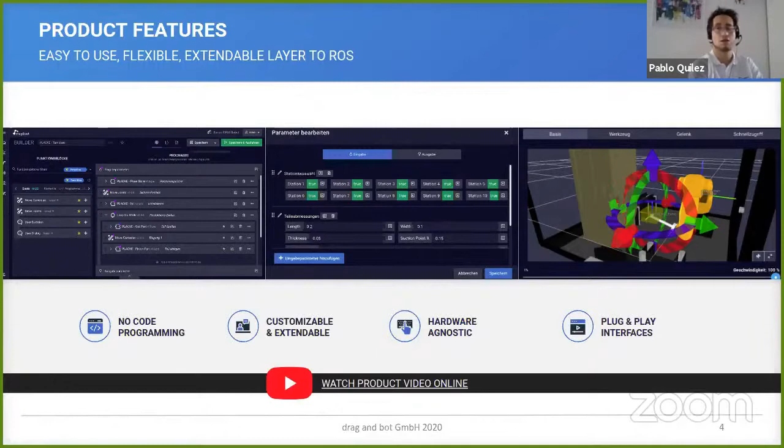This all leads to the plug and play interface, which is our vision, our philosophy. You can connect everything, just like in a computer when you connect a mouse or a printer, and it just works out of the box.

If we look a bit in detail at the scope, DRAG&BOT covers all the necessities of the factory floor, starting from the robots. We support more or less 10 different robot manufacturers, cameras or vision systems, PLCs, different grippers or sensors, feeding systems, and we offer the possibility to integrate any kind of hardware very easily through our API and SDKs. This is why third-party software is very important for us.

From another point of view, DRAG&BOT covers this scope through three different steps. The first one is the planning, which is the simulation. You can create your own program, define your own cell and scenario, and then test, for example, the reachability, the cycle time, and the return on investment.

You can also load your own CAD models into your environment and do simulation with them, so you can grip and use them. And of course create your program, the logic, and run it, everything in the cloud or also locally.

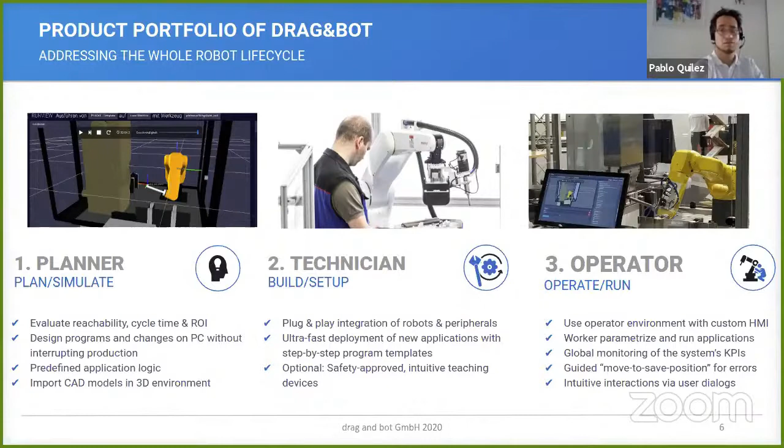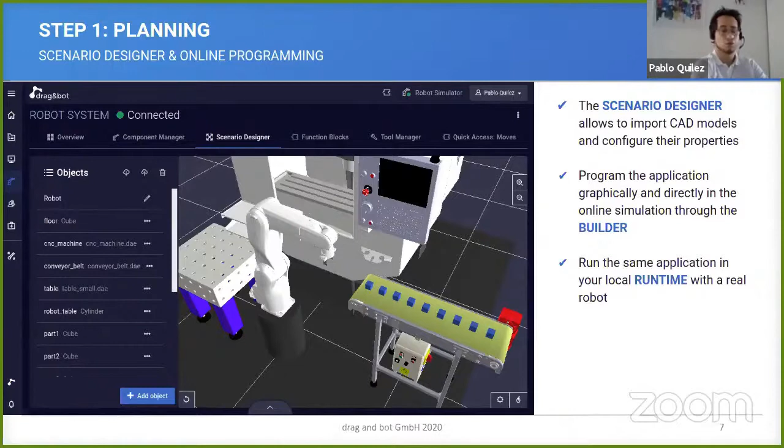In the second step, we display one example: the motionMATE. This is the new way to teach applications. You just need to configure your hardware, place the two sensors around the workspace, mount the calibration tool on the robot flange, run a small calibration program, and then the tracker is calibrated to your robot.

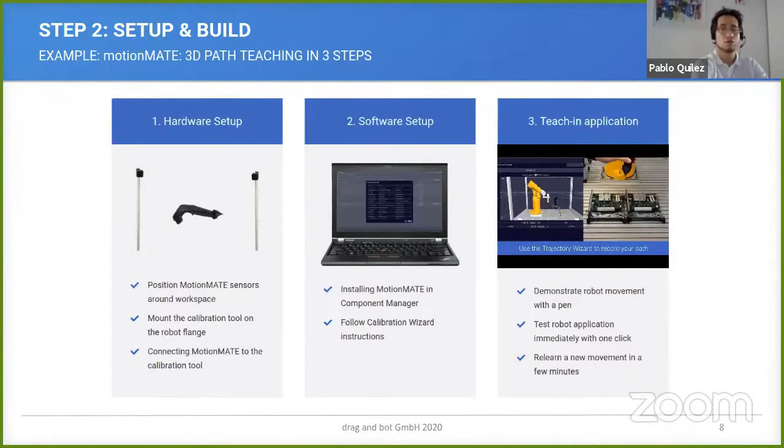I also want to give thanks because in the past there was research done in this aspect, and I think it's quite an interesting idea, which is why we decided to go for this.

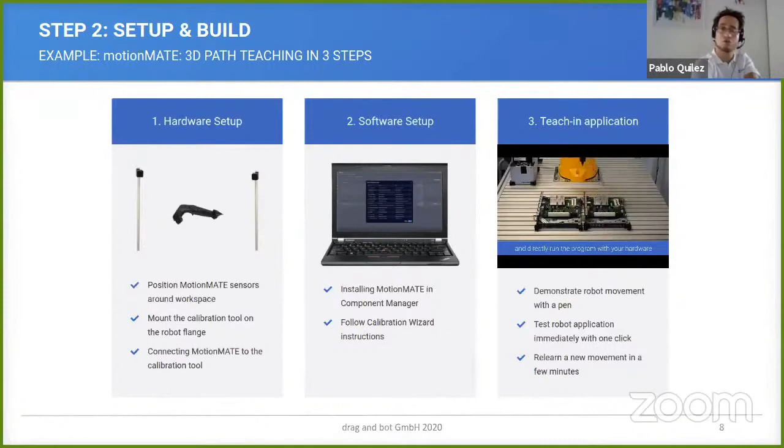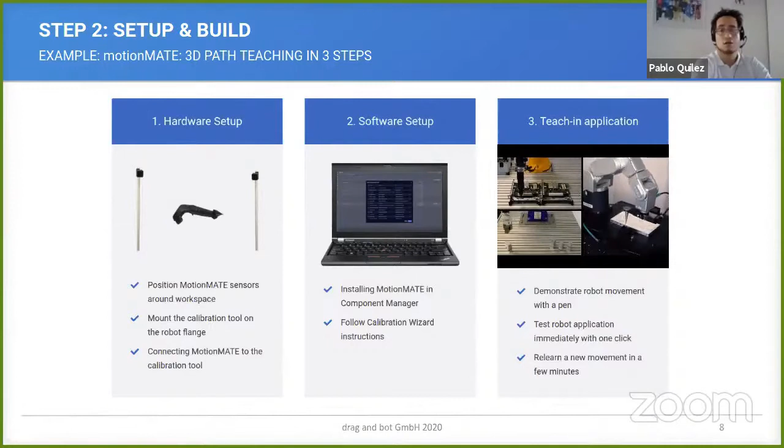In the next step, you configure the software in DRAG&BOT as standard components. You just need to click in a dialog, and then everything is installed. The third step is the teaching itself, where you just take the tracker with your hand and teach the positions.

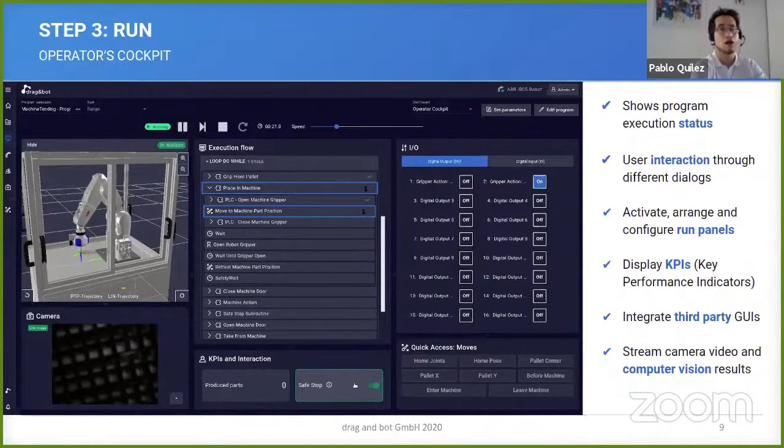In this case, we use quite a standard for displaying the smart cameras, so the web interface from the smart cameras, and then you don't need to deal with complex integration. You just display the IP address, and then you can also access the camera.

In DRAG&BOT Studio, which is the application, you can log in, and with your code a new runtime instance is generated. In this case, the runtime instance is a complete simulation running ROS in the cloud, in a Docker container and in a pool of different machines.

Normally it lives for 10 hours, but you can also have a persistent one on demand. If you are interested in having a runtime which is always active, we have quite a few clients interested in this aspect, so it's a possibility.

We run the full simulation there, which includes the inverse kinematics and the path planning, and also some simulated hardware and software components. This is controlled by a tool we call Simulation Dispatcher, which manages the creation and destruction of the instances. Given a new code, it generates the instance.

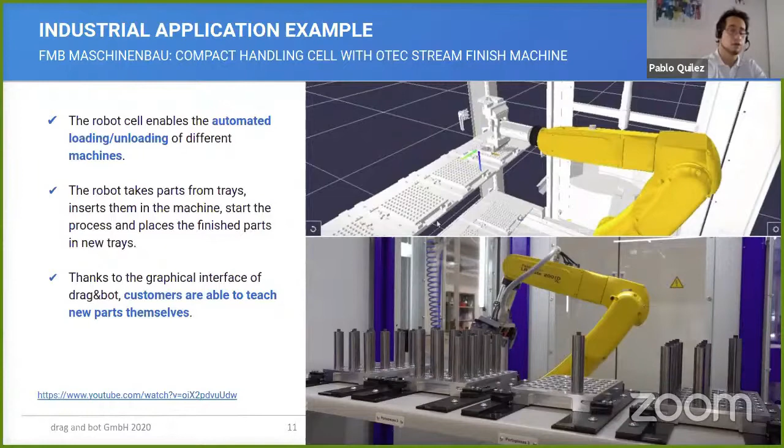Well, going to the live demo. As I said, in the first step, you go to drag&bot.com and then you can register. I will show you live how you can connect.

So wait one second, I'll change the screen. So I share again my screen. I hope this is the correct one. Yes, so as you see now it's loading.

So you go to the website and then you can log in here. One second, I will log in with my data. So I deactivate.

And once you log in, you come to the main view. In this case, you see our system. The first step you see is this welcome screen where you see the different programs you executed in the past and the robot system, the hardware which is configured.

In this case, as I'm not connected with any robot system, I need to create a new one. Therefore, there is the simulation code, which in this case is ROS Industrial 20. And then automatically the instance is created in the cloud. So now there is a real simulated robot which is running everything on the internet.

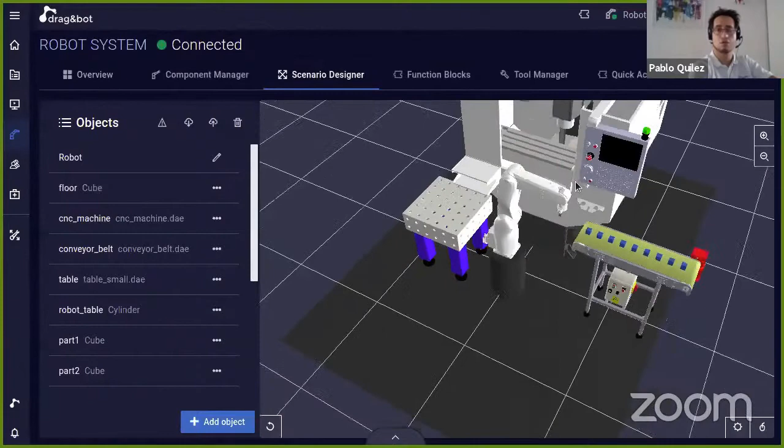So you can see now, if I change to the scenario designer, I see the current scenario which is configured here. It's loading the CAD model. So you see here the machine, and here you see the conveyor belt with the table.

Also, if you want, you can change the robot, for example. I can change here between different wide brands of robots. In this case, I can change to the KUKA, and you will see. Now it's changing the robot.

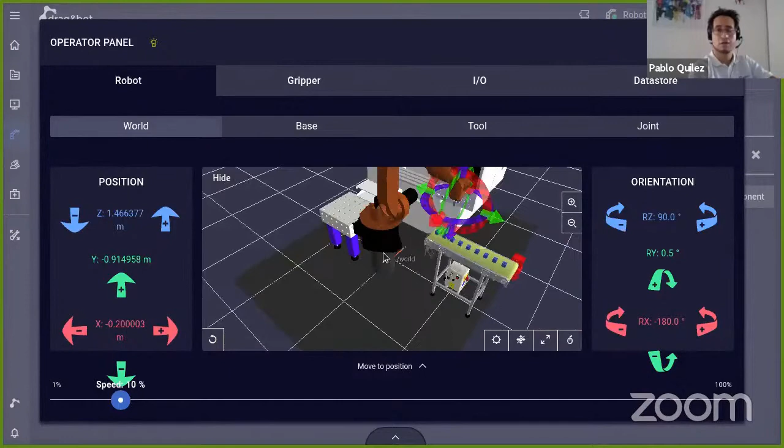And now the new robot will be displayed. So you see now it's quite bigger than before. You can move it in the simulation—I think my screen is a little bit small.

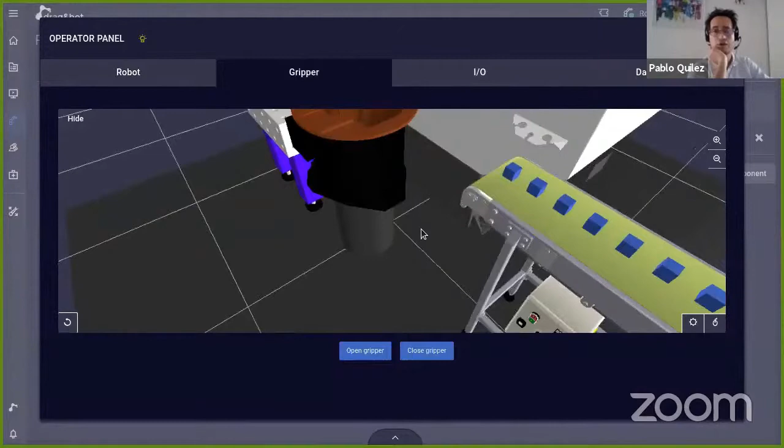So you can move it here, for example to program. Also there are different kinds of tabs where you can close or open the gripper, and also see simulated IOs. And there's a data store, a registry for having persistent data.

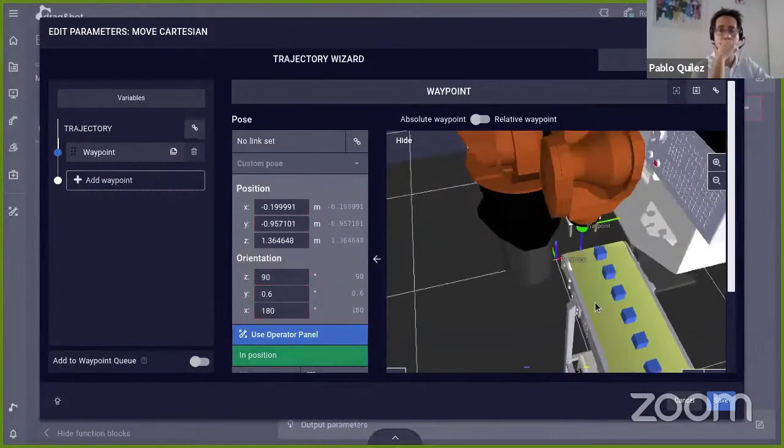Going to the builder, we can create a new application. For example, Move Cartesian—yes, I can teach the position with the current properties, changing to linear, PTP, this kind of thing. So I just move the robot a little bit down, for example, and I can run the demo.

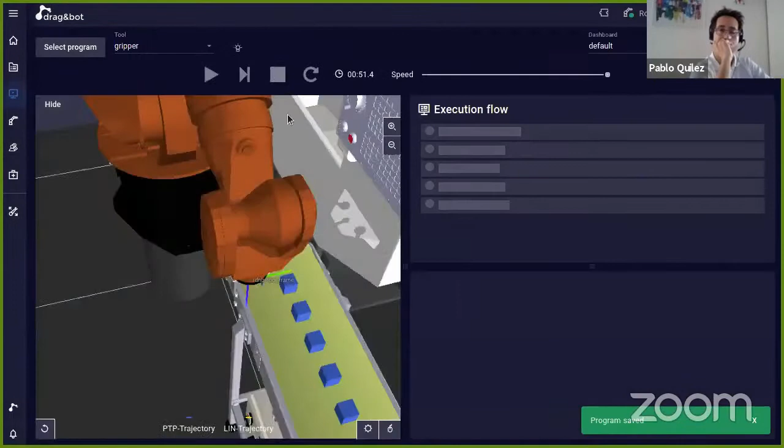So now the robot is already moving. This is everything running fast. Because I just have a couple of minutes, I wanted to show that you can add new components, which are displayed in the list. Depending also if you are working in the cloud or locally, you have different kinds of simulated components. And we prepared a small, nice thing for this.

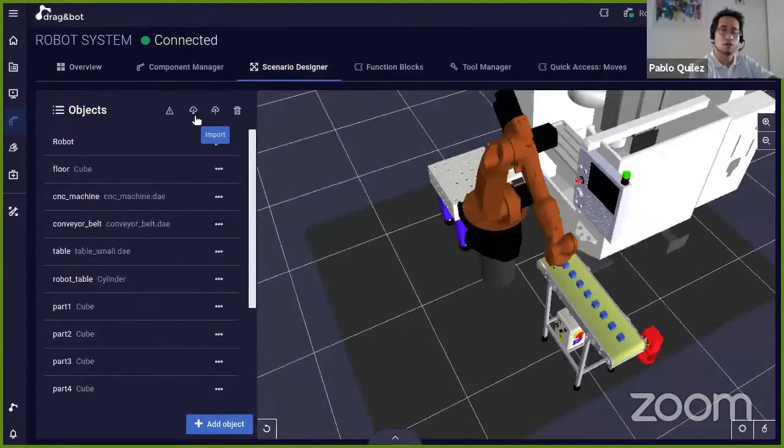Going back to the scenario designer, you can import your own scenario—everything you did, you can import it again. So select file, I load the scenario, which is going to update the scenario now with a little bit more Christmas, fancy tool.

And also we prepared—I think I need to—you can change the tool you are using. In this case it's using this Schmalz vacuum gripper. Everything you can export and import again.

And once you have the scenario, if you come to the program, you see here it's a real program, so you can run it. In this case.

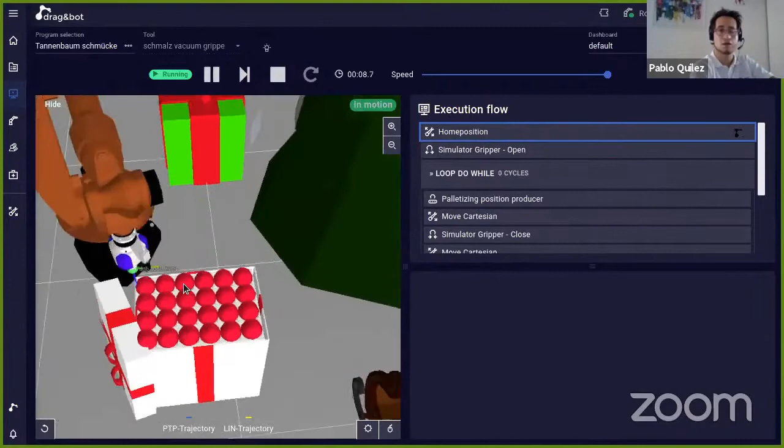And now the robot is going to do a palletizing application, to pick the balls from the pallet and put them on the Christmas tree. So you see the robot is doing it.

And if you take this program, this configuration, with the local runtime version of DRAG&BOT, you can use it directly with your own robot.

I think I'm a little bit out of time, so please correct me if I have more time or not. But in this case, we are already finished. Thank you everybody for your attention, and any questions, I will be happy to answer.

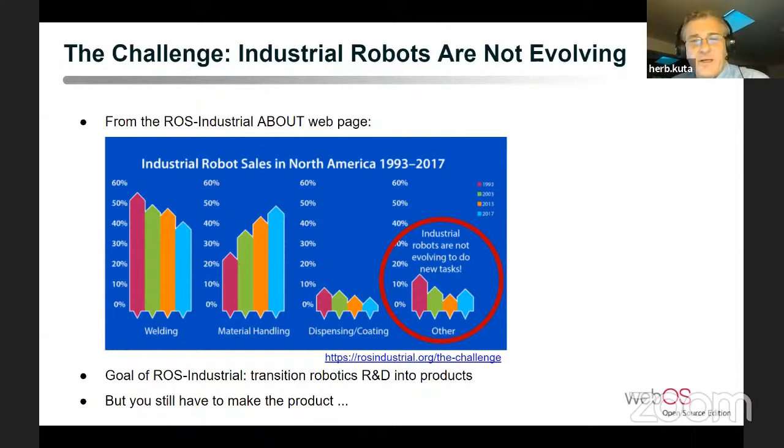But the goal of transitioning robotics R&D into products can't be met without actually building the product. And from a product point of view, there are lots of expectations that need to be met. You may need slightly different variants of what your company sells while maintaining reproducibility of your deployment of all of these. At the same time, you need to keep up to date throughout the product lifecycle with software and security.

Plus, you need to be competitive. You want to offer advanced capabilities and user experiences, and of course, all of this at the lowest possible cost. So how can you create these products while keeping production and development costs low? One possible path is to reduce the hardware costs and simplify the software development, by using mass market embedded hardware and embedded Linux development.

So first, let's take a look at some of the characteristics of mass market embedded hardware products that are already being deployed and scaled globally. These include things like smartwatches, smart TV, mobile phones, routers, etc.

These products have embedded hardware built from low-cost system on chips. They are customized for dedicated functionality and have a low memory footprint, low power consumption, while still having real-time performance. Every use case has these things to be as fast as possible, and for devices with displays, as rich a user experience as possible.

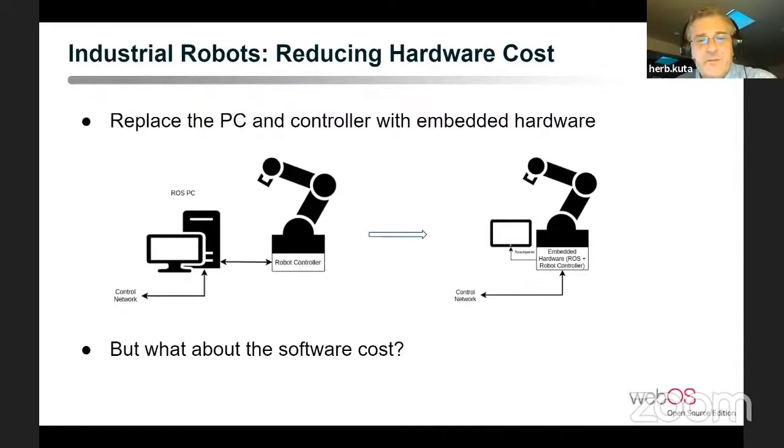With traditional embedded development, there can be many challenges in this process. You need to support multiple hardware variants. There's cross-development and support of different architectures. Significant customizations need to be made for every product line or version. And of course, many optimizations need to be done to fit into the form factor you've chosen.

So as you can see, there are challenges associated with scaling robots that are common to embedded devices. Our solution for commercialized industrial products at scale is to use embedded hardware, open embedded, a base embedded Linux that simplifies the challenges with software development, add ROS to bring in the robotics capabilities, and then put in WebOS, which is LG's open source embedded Linux deployed on millions of devices, which may bridge some of the gaps to actually finishing a product. Let's see the parts of this solution in a little more detail.

Next, I'll discuss the work we've done to enable robotics development on open embedded.

Let's start by giving you a brief introduction to open embedded to hopefully give a feel as to why LG uses it to simplify its development of embedded devices. You can find more detail at the link shown at the bottom of the page.

Open embedded is the build system for the Linux Foundation's Yocto project. It allows cross-compilation for many different CPU architectures, including RISC-V, by the way, and a wide variety of chipsets and boards are supported.

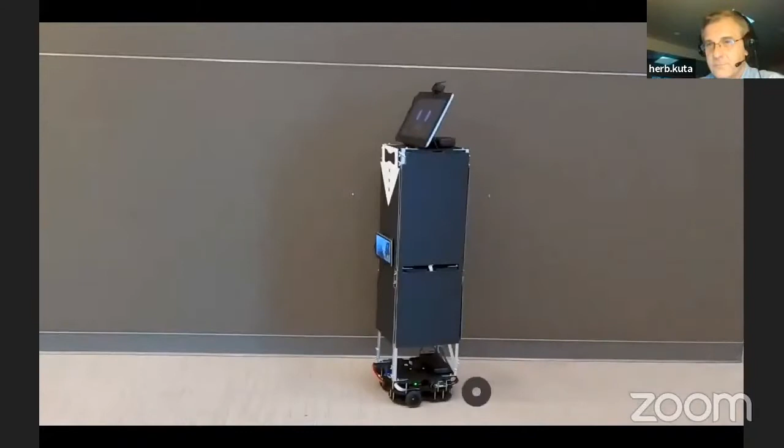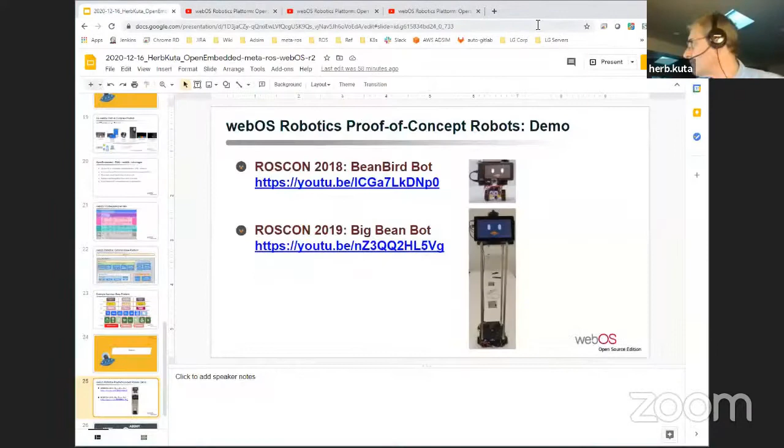Oh, let's see. Whoops, I'm sorry. I think I got to stop that. Sorry.

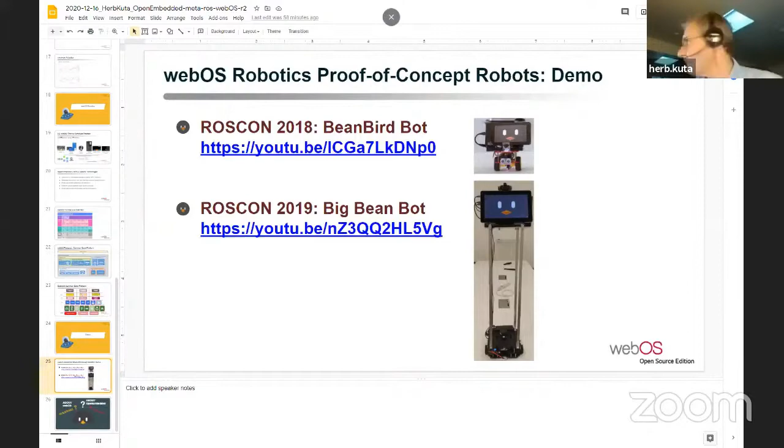Everyone, and welcome. I'm sorry, people. Anyway, and I don't know, I think I'm out of time, so I guess we'll have to ask to have any questions at the general session.

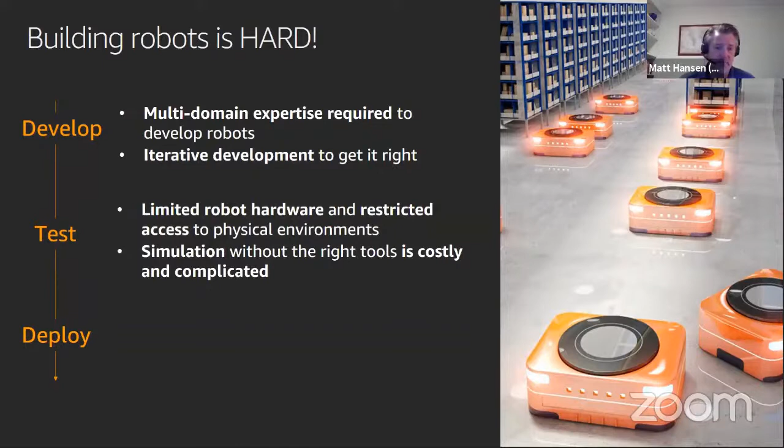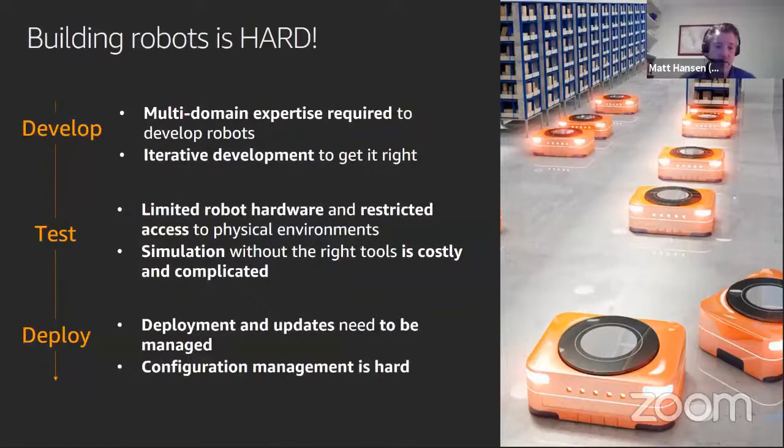Finally, there's deployment. Deployment is a critical part of your software development flow in that as you make changes, you need to update your robots in the field. You need to be able to do over-the-air updates, and you need to be able to track which robots have which updates when and which robots do not and still need to be updated.

So this is where simulation comes in. As I mentioned, building robots is hard, as many of you already know. Testing software on hardware can be a development bottleneck, but simulation allows you to gain confidence in your software before putting it on your hardware. Therefore, you can test your hardware and your software in parallel and decrease that bottleneck. You can also automate your software testing into your workflow to ensure that every new code change is working prior to merging. We'll talk more about that as well.

So why should you do simulations in the cloud? Well, it's all about scale and quality, right? With the cloud, with simulation, you get the most out of simulations when you can run a lot of them. So you get much more robust testing when you run a lot of simulations, when you test a lot of scenarios. For example, you may want to test your robot around stairs or ramps, and different building configurations, different objects in the world.

And then you can also scale the number of environments. So you can scale the shapes and sizes of the worlds and the number of worlds. And finally, for reinforcement learning, you can use simulation to accelerate your training of your machine learning models. And you can do parallel simulation and use that feedback to accelerate your machine learning, reinforcement learning training.

Let's take a closer look now at the regression testing use case. Milvus Robotics makes a UV disinfecting robot for hospitals, which is increasingly important and a rapidly growing application. Because of this growth, they needed to increase development velocity while improving quality and maintaining high safety standards. Real-world testing was challenging because they couldn't get access to real hospitals for testing, and building mock-ups was expensive and time-consuming. This made finding software defects difficult and slow. But with RoboMaker, they were able to run simulations in a virtual hospital, automate their testing, and speed up their development flow.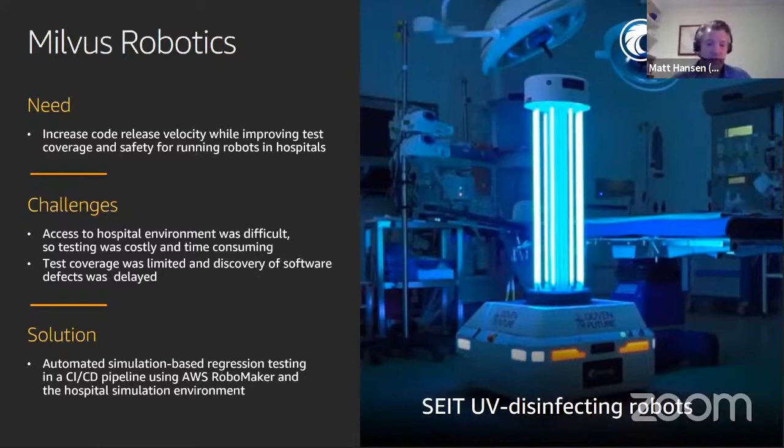As a result, Gokul Ertunç, the co-founder and CIO of Milvus Robotics, has said: AWS RoboMaker simulation helped us save money and time and eliminate obstacles to scaling our testing efforts. With RoboMaker, we can forget about infrastructure and focus on development and testing. We implemented a RoboMaker simulation CI and can now easily test our robots in different environments, resulting in a huge quality improvement.

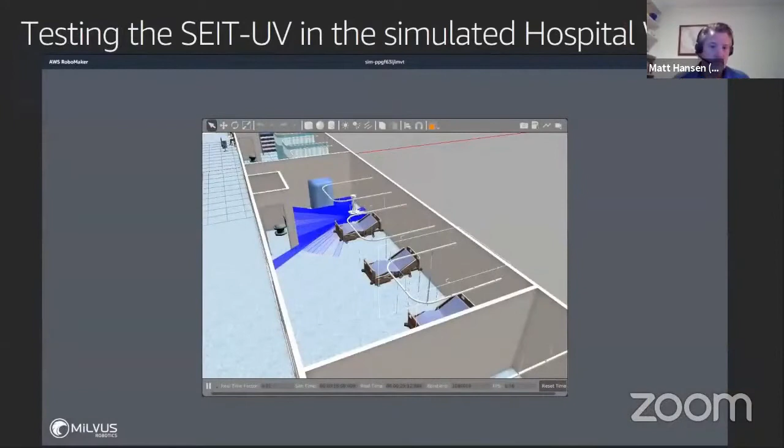Here's a video of Milvus testing their UV disinfecting robot in a simulated hospital world. The robot is moving around the hospital room with 3 hospital beds, and the blue lines you see represent the laser scan it's using to sense objects around it as it disinfects autonomously.

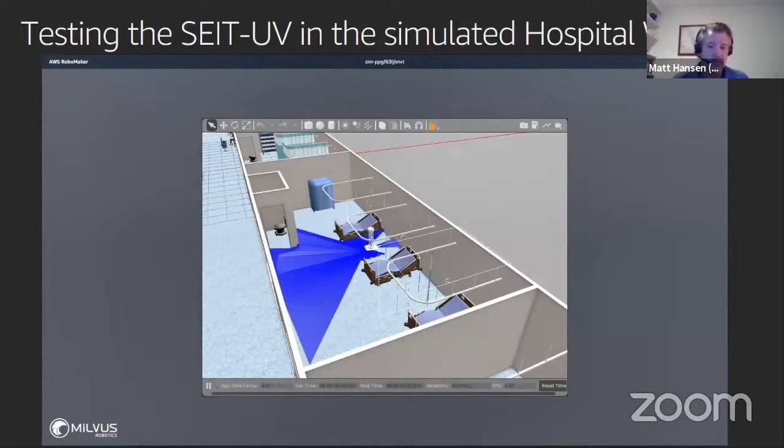The next use case I'd like to talk to you about is multi-robot simulation in RoboMaker. We've heard from a number of customers over the last few years about how difficult it is to test orchestration and navigation of a fleet of robots.

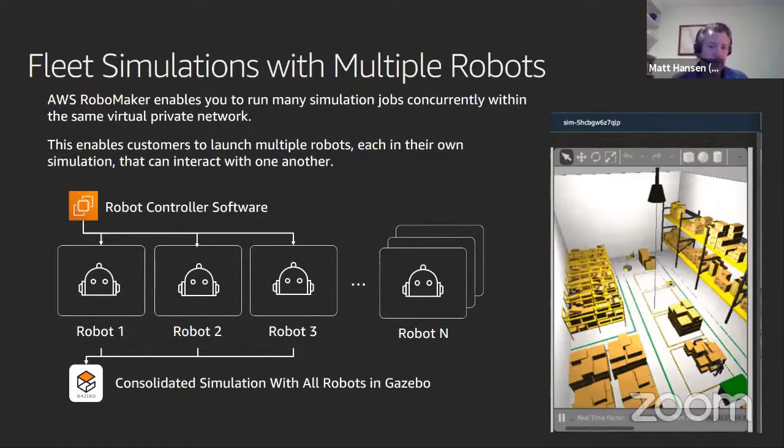As an example, when you have multiple models or types of robots operating in the same environment, relying on physical robot testing requires significant logistics work before you can even begin to test them. Testing them in the real world is difficult. So AWS RoboMaker enables you to simulate multiple robots, running multiple Gazebo instances in parallel, and then managing the interaction between them using Gazebo plugins, and then leveraging the built-in integrations with the AWS Virtual Private Cloud. RoboMaker enables you to connect concurrently running simulation jobs.

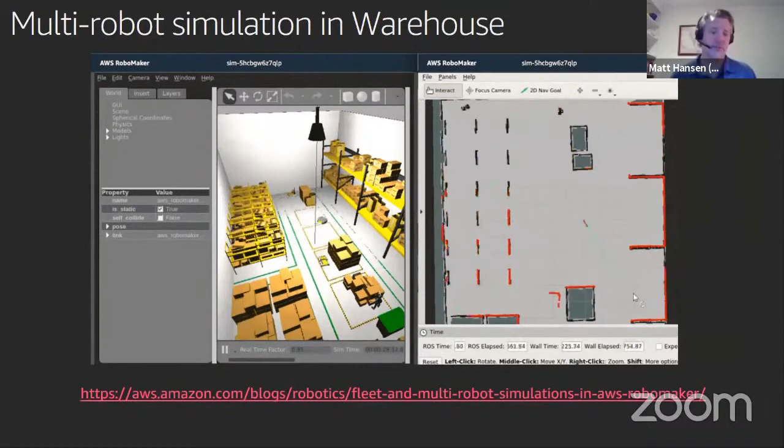Here's a more detailed look at the architecture for the multi-robot simulations. It starts with our RoboMaker batch simulation API, which allows you to launch a number of simulations in parallel in the cloud. Here we're going to launch 1 to n particular simulations, for n being the number of robots we want to simulate. Every robot is assigned a namespace, and communication is bidirectional, which enables the robots to see and interact with each other.

The entire simulation is bridged together using ROS bridge, and the entire fleet is running. Multiple simulation jobs can be launched with this batch simulation API.

Next, I'd like to talk to you about reinforcement learning, our third use case. I wanted to share this one with you, not just because it's reinforcement learning, but because it involves robots on Mars, which personally I think is very cool.

Earlier this year, we held the AWS JPL, Jet Propulsion Labs Open Source Rover Challenge. It's a 4-month competition where participants from around the world use deep reinforcement learning to drive digital robot models on a virtual Mars landscape. Participants created autonomous navigation models for their robot and trained them in AWS RoboMaker simulation. The virtual robot used in this competition was based on the NASA JPL open source rover, which is a build-it-yourself, scaled-down version of the 6-wheel rover that NASA uses on Mars.

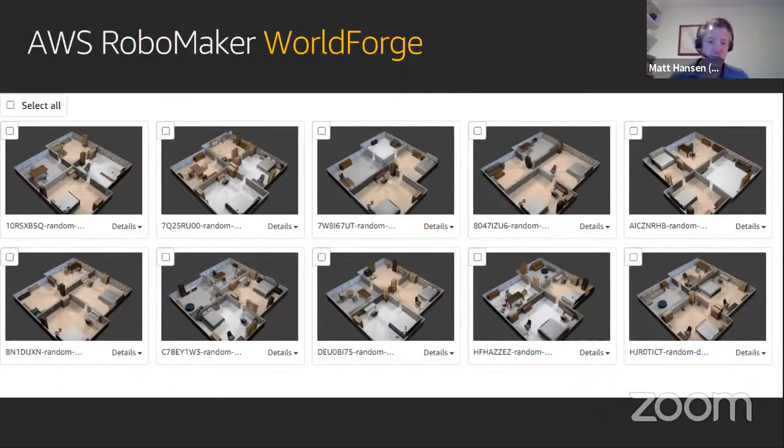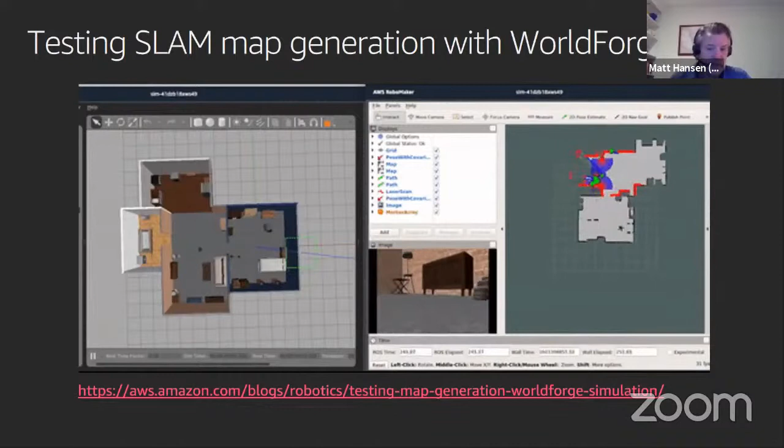When testing SLAM algorithms, having a variety of maps of different shapes and sizes is good for testing things like loop closure. With WorldForge, you can easily create a large number of worlds, and using the RoboMaker batch API, launch multiple simulations in parallel running SLAM. Then you can compare the resulting maps versus the ground truth to ensure correctness. As mentioned before, this can be automated into a CI/CD flow to prevent regressions in your SLAM algorithms.

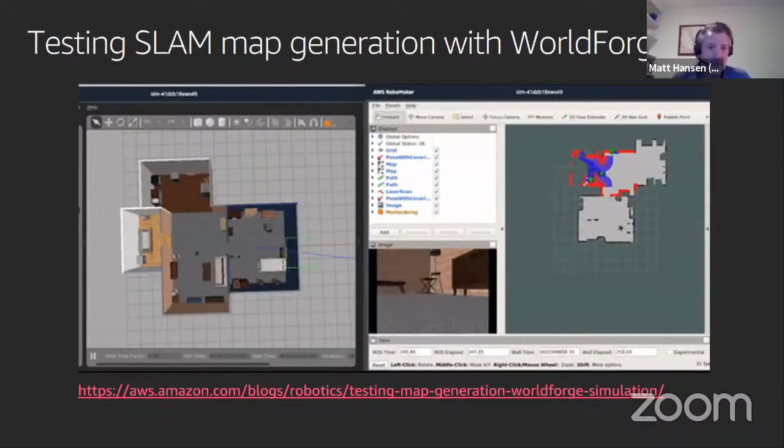Finally, I'd like to talk about the AWS ROS open source contributions and resources. One of the many benefits of ROS, as most of you know, is that it's easily extensible. AWS RoboMaker has created ROS packages that can be used on a robot or in simulation to access other related AWS services, such as Amazon Lex for speech recognition, Polly for speech generation, because you want your robots to talk too, right? Rekognition for image recognition, and of course Kinesis and CloudWatch, which I've already mentioned.

However, AWS contributions to ROS go well beyond adding AWS cloud support. Over the last several years, AWS Robotics has made many contributions at all layers of the stack and multiple tools. Some of our most recent contributions to ROS2 Foxy include quality improvements in the client layer, adding a rolling distribution, improvements to ROS Launch and ROS Bag 2, quality of service improvements, and many, many more. We're also a highly active member of the ROS2 Technical Steering Committee, and we are dedicated to making ROS2 a truly production-grade framework for the long term.